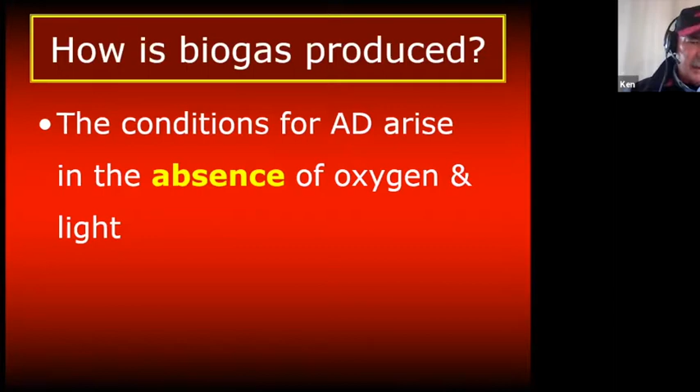So let's have a look at how biogas is produced. Biogas is produced via the natural biological process called anaerobic digestion. The conditions for anaerobic digestion arise in the absence of oxygen and light. AD biologically transforms organic material into two products, biogas and digestate. AD has evolved over billions of years into biological perfection.

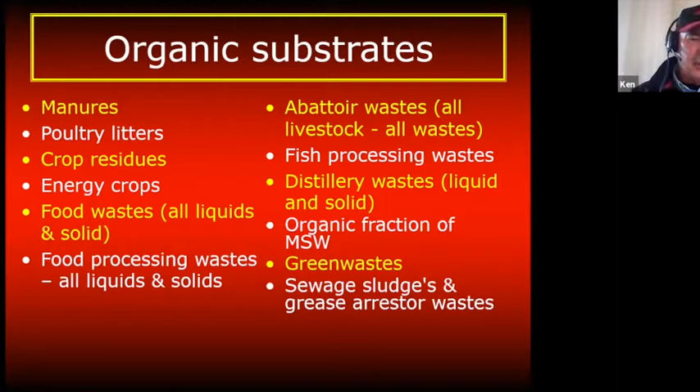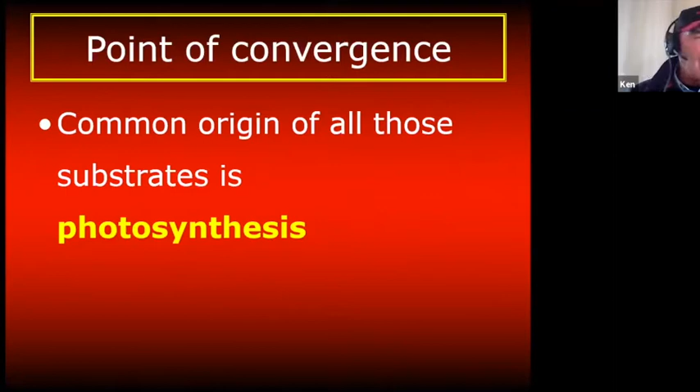Let's have a look at a biogas plant as the point of convergence between photosynthesis and anaerobic digestion. Substrates is the term we use to describe the organic material being fed into a biogas plant. And this is just a very small selection of those substrates. The common origin of all those substrates is photosynthesis. They all came into existence at some point through photosynthesis.

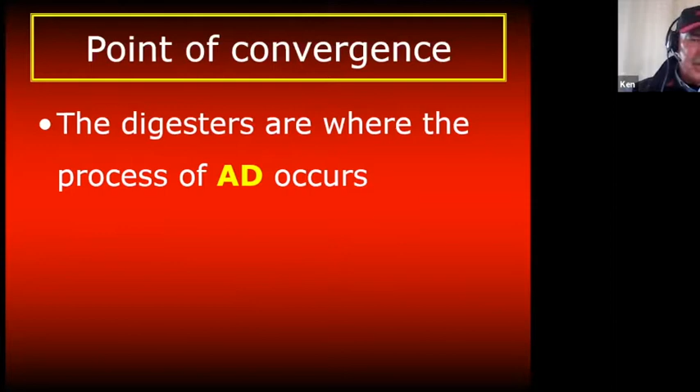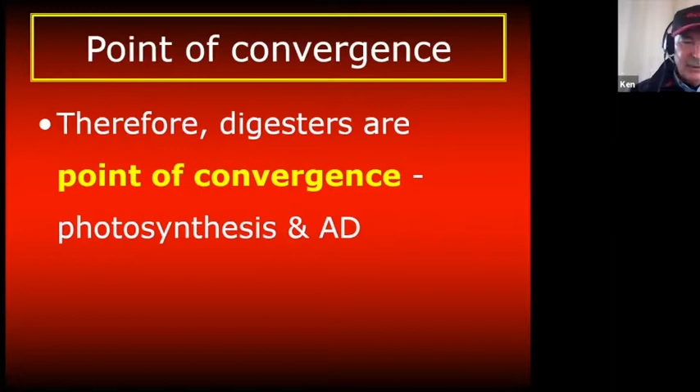The digesters are the main structural elements of a biogas plant. In this photo, the digesters are the large tanks. The digesters are where the process of anaerobic digestion occurs. Therefore, the digesters of a biogas plant are the point of convergence between the products of photosynthesis and anaerobic digestion. Digesters come in many shapes, sizes, and functionalities, but they are always this point of convergence.

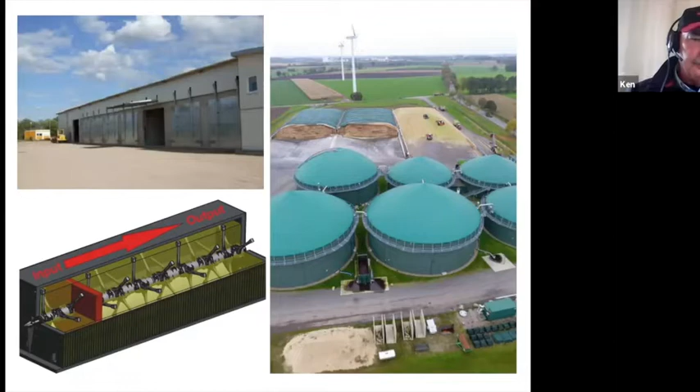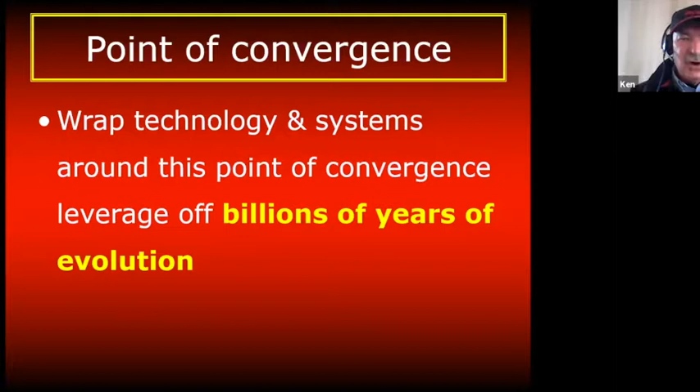The material transformation that ensues from this point of convergence delivers total resource recovery, value adding, and zero waste. All we humans do is wrap layers of technology and systems around this point of convergence to leverage off what billions of years of evolution naturally delivers.

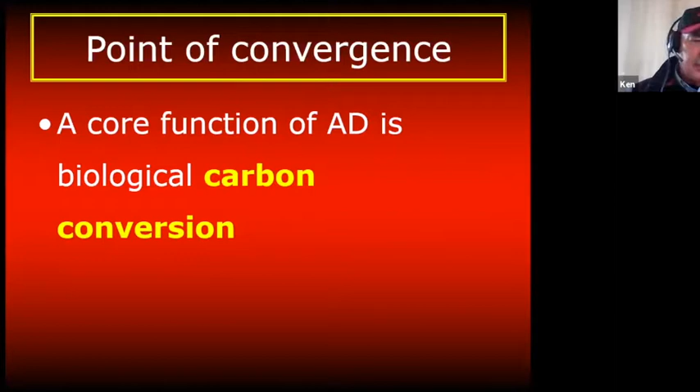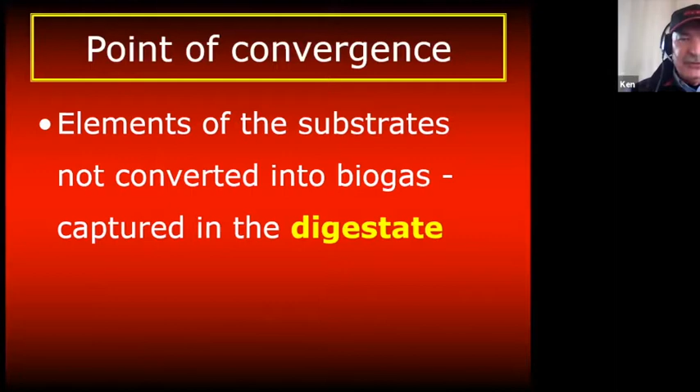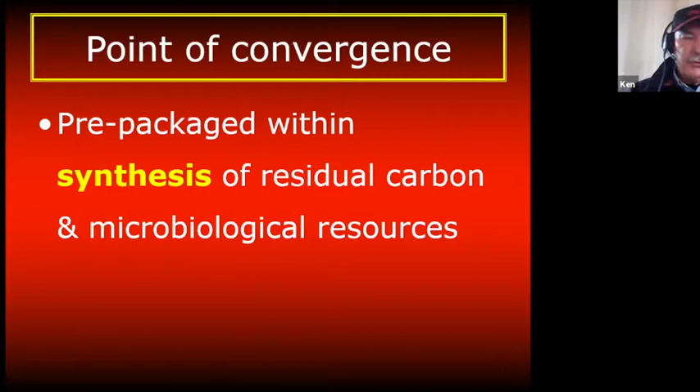All the nutrients from the substrates are captured in the digestate, and these nutrients come pre-packaged within a synthesis of residual carbon and a huge soil-building microbiological resource. The digestate is fully recyclable back into agriculture.

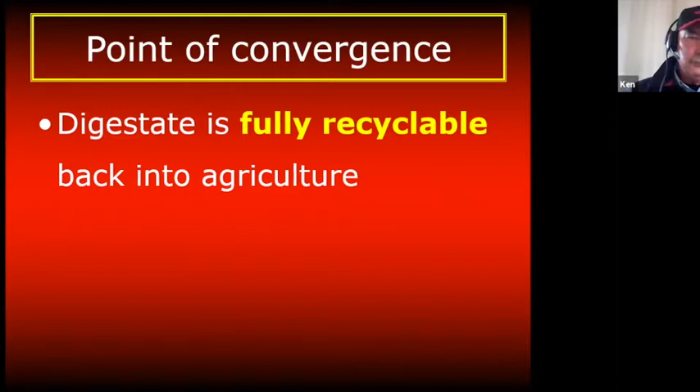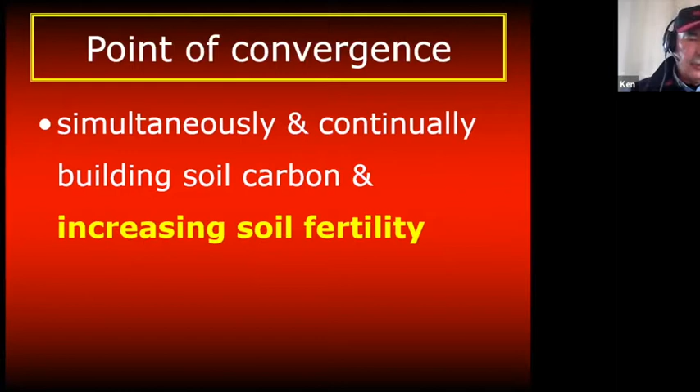If the full potentials of AD and biogas are captured within an optimized circular economy system, the strategic use of the digestate enables more food and more energy to be sustainably produced from the same area of land. And this is done whilst simultaneously and continually building soil carbon and increasing soil fertility. The biogas itself is just converted solar energy.

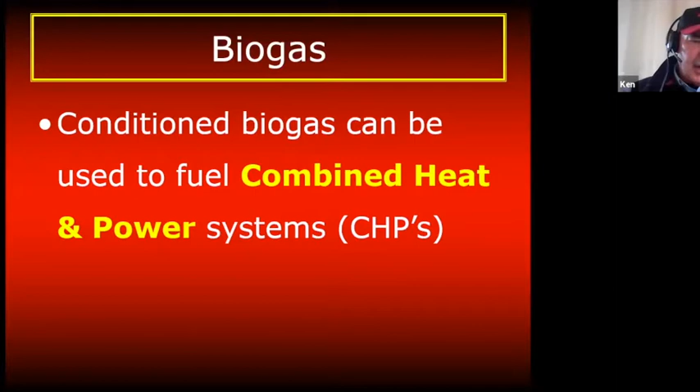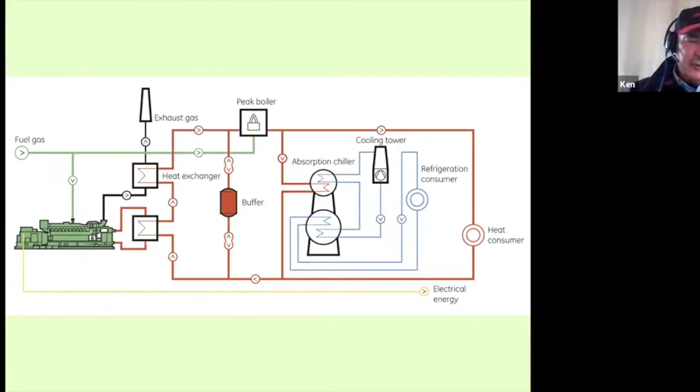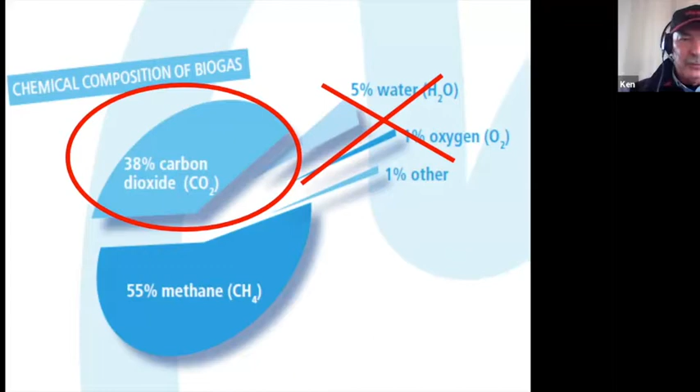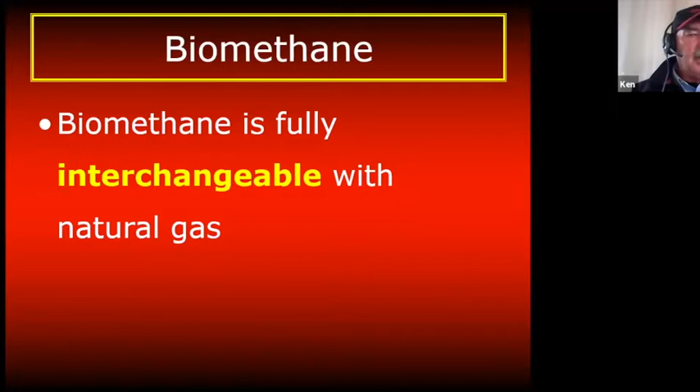Now let's have a look at biomethane. Biomethane is conditioned biogas with the CO2 removed. Both the renewable methane and the green carbon dioxide can be captured as separate gas streams because both have infinite roles to play within a circular economy system. Biomethane, also known as renewable natural gas or RNG, is completely compatible and fully interchangeable with natural gas.

In Europe, the focus of AD and biogas is shifting more towards biomethane. In Europe, biomethane production increased over 2,000% in the 5 years to 2016. In the next 6 slides, we'll look at some major biomethane initiatives. Italy has set a target to inject 288 petajoules of biomethane into its gas grids by 2030. This biomethane will be produced from both agricultural and urban sourced substrates.

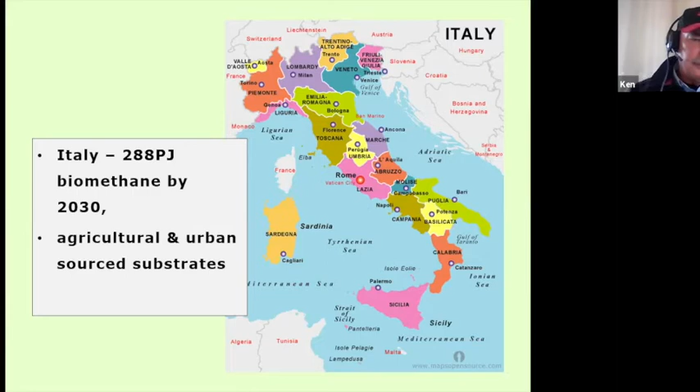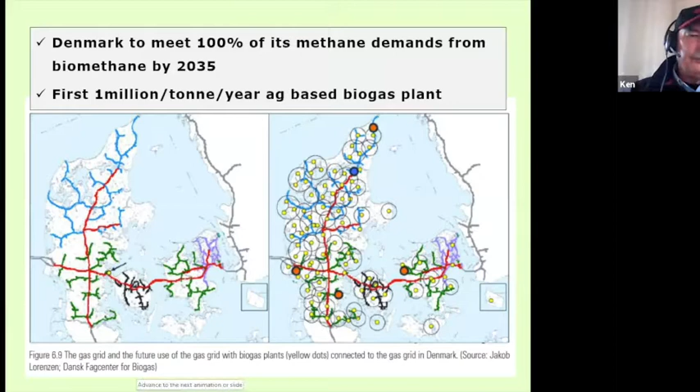A consortium of 7 European gas transport companies, plus the European Biogas Association and the Italian Biogas Association, commissioned a report called Gas for Climate. The report identified 122 billion cubic metres of renewable gas could be developed by 2050, with half of that being biomethane from anaerobic digestion. That is 2,268 petajoules per year of biomethane by 2050.

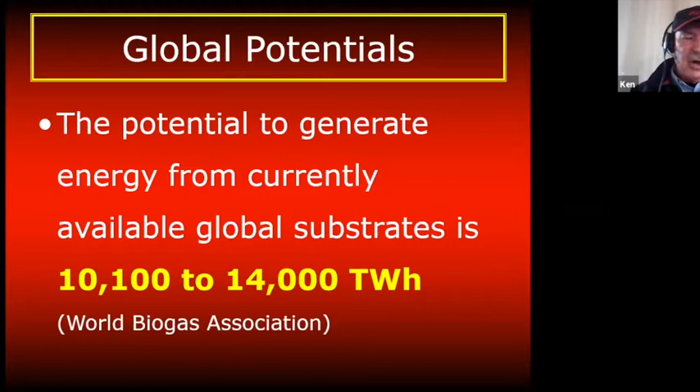Let's have a look at the global potentials of AD and biogas. The following information comes from a recent global study undertaken by the World Biogas Association. The potential to generate energy from currently available global substrates is 10,100 to 14,000 terawatt hours. This amount of energy can support 6 to 9% of the world's primary energy consumption, or 23 to 32% of the world's coal-based energy.

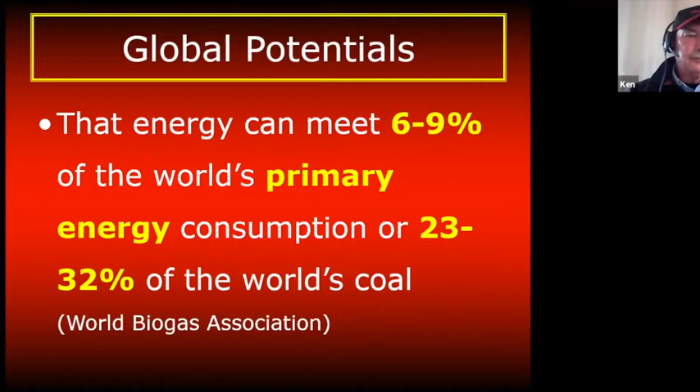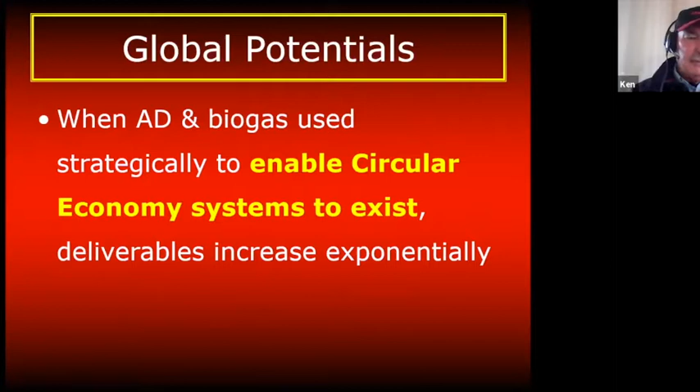AD and biogas have the potential to reduce global greenhouse gas emissions by between 10 to 13%. When AD and biogas are used strategically to enable circular economy systems to exist, the global deliverables increase exponentially. Let's have a look at some examples of circular economy systems that are enabled by AD and biogas.

This is a vertically integrated broiler cluster enabled by AD and biogas. The system simultaneously produces energy, food, feed, and organic fertilizer as system co-products. The efficiency of this system is orders of magnitude greater than any existing broiler cluster. This system produces 4 to 6 times more energy than it consumes, and this includes transport energy. These same principles can be applied to many livestock-based systems. The perennially struggling Australian dairy industry could be reinvented through the widespread adoption of AD and biogas-enabled circular economy principles.

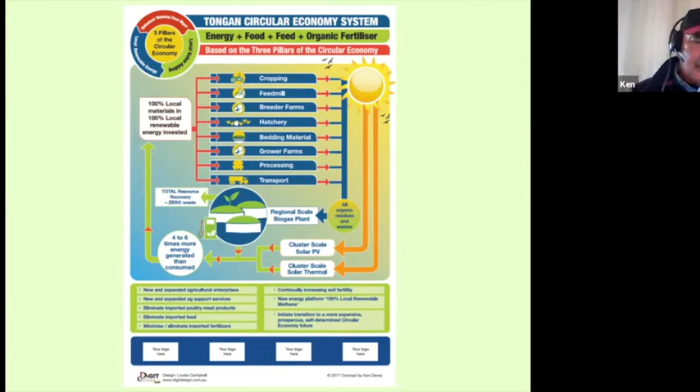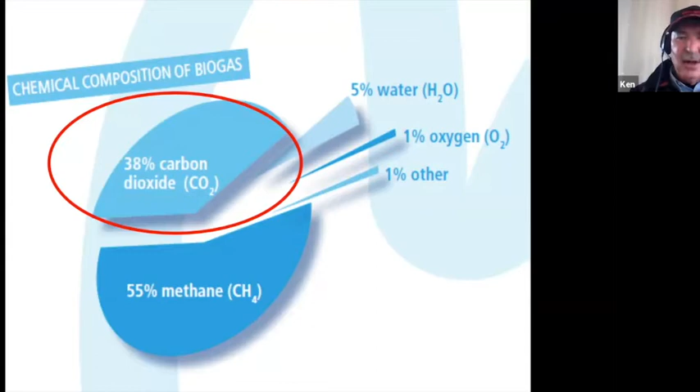The other main input into this system is liquid nutrient. This liquid nutrient can come from the liquid fraction of the digestate. The energy to dry and process the seaweed into a wide range of high-value products can come from a biogas fueled CHP. The synergies between AD, biogas, and Pia's seaweed system are simply compelling. We are hoping to develop such a system in the Newcastle Hunter area of New South Wales. This system will be based predominantly on urban source substrates. If this project proceeds, it's likely to be the first biogas plant in Australia that injects biomethane into the gas grid.

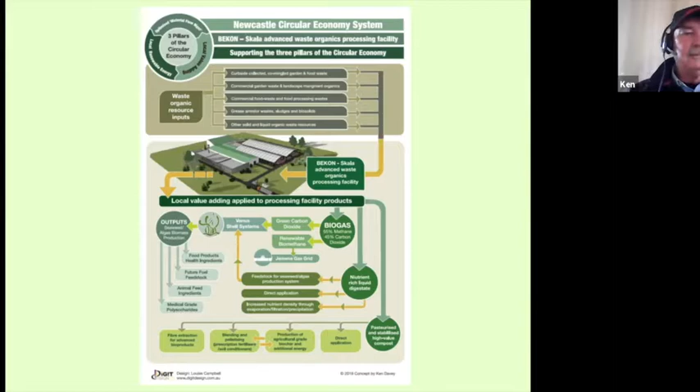Drought is a big issue in Australia right now and will become a bigger issue into the future. So let's see how AD and biogas can build drought resilience into agriculture and regional communities at an industrial scale. The majority of the 18,000 commercial biogas plants in Europe are agriculturally aligned. In Europe, biogas is largely an agricultural-based energy and total resource recovery platform. The production of food, feed, fibre, and energy are entrenched elements of European agriculture.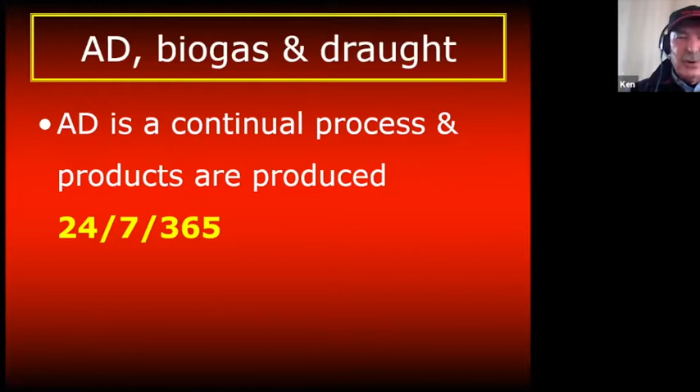AD is a continual process where products are produced 24/7, 365 days a year. This provides the farmers and the regional communities connected to biogas plants with a continuous source of income. Let's see how this continuous source of income can be applied to alleviate the financial stress of drought.

These are various crop residues left over after harvesting. Not all of this residue resource can be harvested, but much of it can, leaving just enough to keep the soil bound and protected against soil erosion. Excess residues left behind in the paddock contribute little to soil carbon and nutrient retention because much of this benefit is lost under the conditions of uncontrolled aerobic degradation.

In a good year, well over 20 million tonnes of crop residues would be available for collection and processing across Australia. There are many commercial systems dedicated to the harvesting and baling of these crop residues. These residues can be stored as square bales, or in round bales, or in silage clamps for residues with higher moisture content.

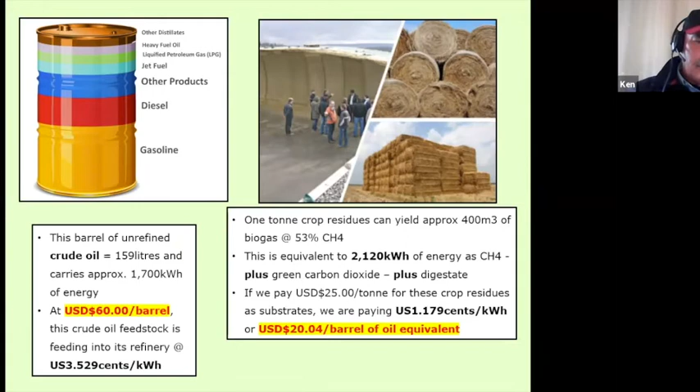On the left, we have crude oil feeding into an offshore oil refinery that we have no control over for US $60 a barrel. On the right, we have local biomass feeding into a fully sustainable, 100% local industrial scale biorefinery that we have total control over for US $20 per barrel of oil equivalent.

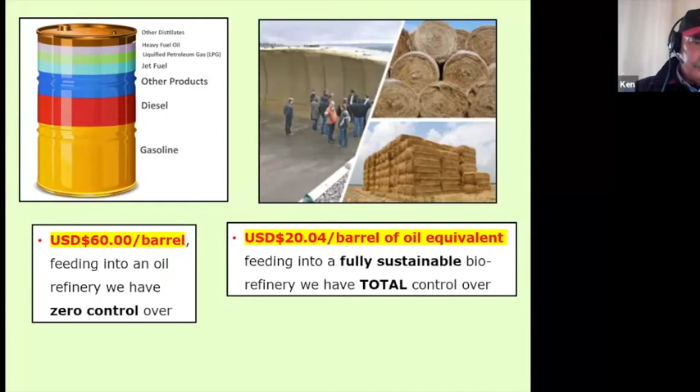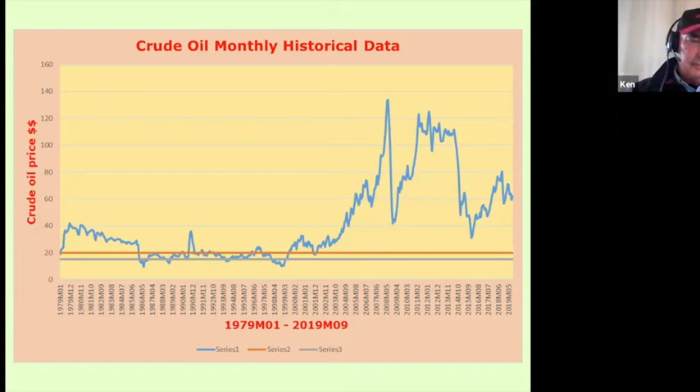This is a graph of crude oil prices over the last 40 years. The two straight lines down the bottom are set at $20 and $15. And as you can see, there has been very little time over the last 40 years where crude oil prices have been below those lines.

Importantly, because our industrial scale biogas plant exists, every kilogram of waste and opportunity-based substrate from within the region will be directed to the biogas plant for co-digestion. An example of an opportunity-based substrate is a commercial crop that has been storm damaged and is no longer fit for purpose. Another example is that in good years, it's not just crops that grow well. There's also huge quantities of landscape-based biomass.

Because the biogas plant exists, it's now economically viable to harvest this landscape-based biomass and direct it to the biogas plant. It's important to remember that via the digestate, we will be transferring all of the nutrients and some of the organic carbon from this landscape management biomass into our agricultural soils. When the region starts to apply the deliverables of this biorefinery to value add to the local agricultural production, more waste streams will become available.

Now let's have a look at how digestate is handled at this industrial scale. Tankers are used to transport the pumpable digestate to the farms. The digestate is transferred to a holding tank and a pumping unit and is sent out through a long, flexible umbilical pipeline. On the other end of that umbilical pipeline is a tractor equipped with a digestate injection system.

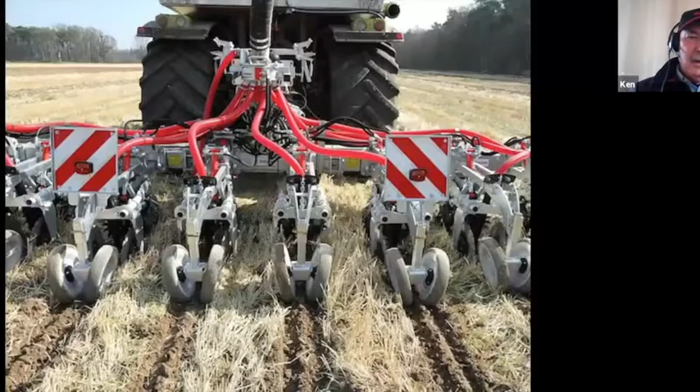This strip till system is the best of the digestate injection systems, and it opens a small trench, injects the digestate into the root zone of the soil, then forms, closes, compacts a protective soil mound over the injected area. The incorporation of other nutrients, along with agricultural grade biochar, within the injected digestate is fully achievable and desirable. When compared to leaving the unharvested residues in the paddock, this system delivers substantially superior outcomes.

Additionally, through this continual digestate application, we have created a platform for the participation in carbon markets at a regional level. The digestate can also be applied to emerging crops via this dribble bar system.

So, is AD and biogas worth the effort? Let's have a look at the German biogas sector for some guidance. The development of the German biogas sector began in earnest in the year 2000 via the legislated Renewable Energy Sources Act. The Renewable Energy Sources Act is, in my view, the most inspired piece of public policy in generations. What that piece of inspired public policy has unleashed is simply unimaginable. A complete socio-economic transformation.

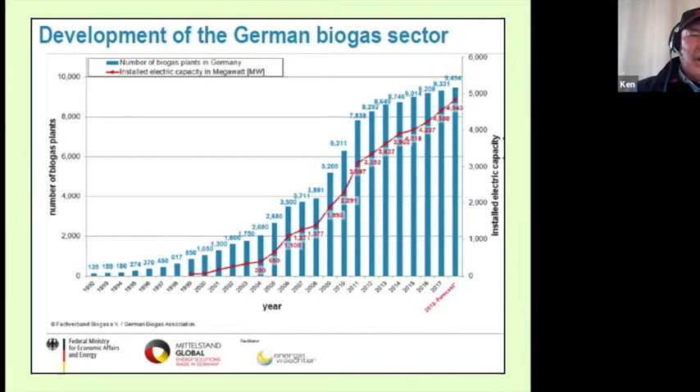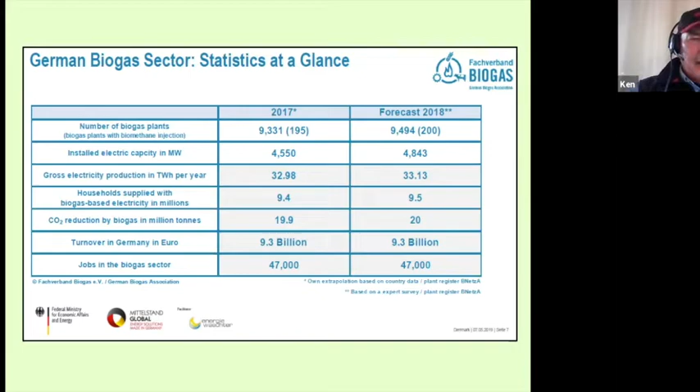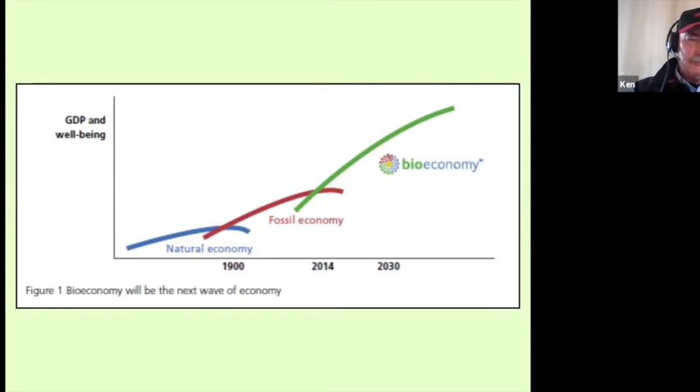And this graph comes from a body of work initiated by the government of Finland. It was a whole of government exercise with expansive and extensive public engagement. This investigation looked at the socio-economic deliverables that would ensue from shifting Finland onto a bio-based circular economy platform. As captured by the trajectory of the green line, transitioning Finland onto a bio-based circular economy development platform will enable a level of socio-economic prosperity that has never been experienced before in the history of Finland. And thank you.

Thank you very much, Ken. It's a brilliant presentation. A lot of technical stuff there, but it's all put together. It's a fantastic story. Now, I'll bet there's a few questions out there. Who has a question? Would you like to turn your slides off, please, Ken, and we can see each other? Okay, yep. Where do we go for that? Yeah. Yes, Peter Todd.

Obviously, the German focus is on kind of rural products. Are forestry products also relevant for biodigesters? No, not really. The best material for digestion is stuff that you would characterize as soft green material. If it has a high lignin content, then generally it's not good for digestion. There are some exceptions to that rule, but generally speaking, if you put a kilogram of lignin into the front end of the biogas plant, you'll get a kilo of lignin out the back end. So it's material that can be described as soft green material.

But what I've done now, I've only spoken about agricultural-based residues. You've also got, of course, all of your urban-based substrates. You know, most of the food waste and a lot of the green waste that we collect in our urban environments can go into biogas plants. And it is routinely done all over the world. So because we're the most urbanized country in the world, and we have quite large cities, we've got huge quantities of digestible biomass in our urban environments.